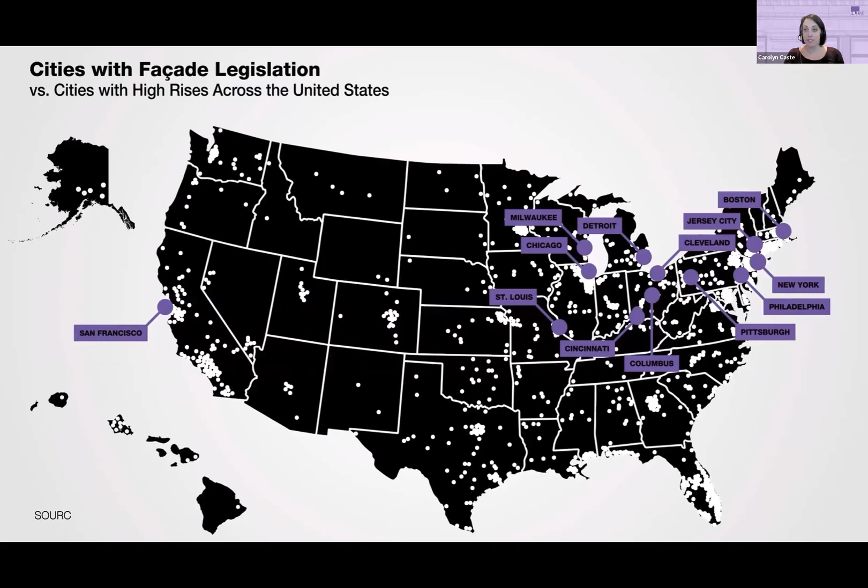As you can see with this diagram, New York City is not the only city with the regulation in place. However, it does have some of the most stringent requirements. Currently, there are 14 cities in the US with a similar rule, and Jersey City just added a similar regulation, which includes inspections of concrete structures, which was due in December of 2022, and a facade inspection program as well for any building over 4 stories that is due in December of this year. So just wanted to bring that to anyone's attention that may not have been aware of that.

To get into some more information about the New York City facade inspection and safety program, any building that is greater than 6 stories in New York City must inspect their exterior walls and appurtenances periodically. This must be performed by a qualified exterior wall inspector, otherwise known as a QEWI. And we must inspect the building, perform close-up inspections, and submit a report to the Department of Buildings that they find acceptable.

The FISP rule originally went into effect in 1980, and it's been updated several times in the past 40 years. It started out as Local Law 10 of 1980, and most people still refer to FISP as Local Law 11, which stems from Local Law 11 of '98, which was one of the updates. But it was changed to FISP in 2010, and then additional new updates were implemented in 2020, and I'll go into some details about that in a little bit.

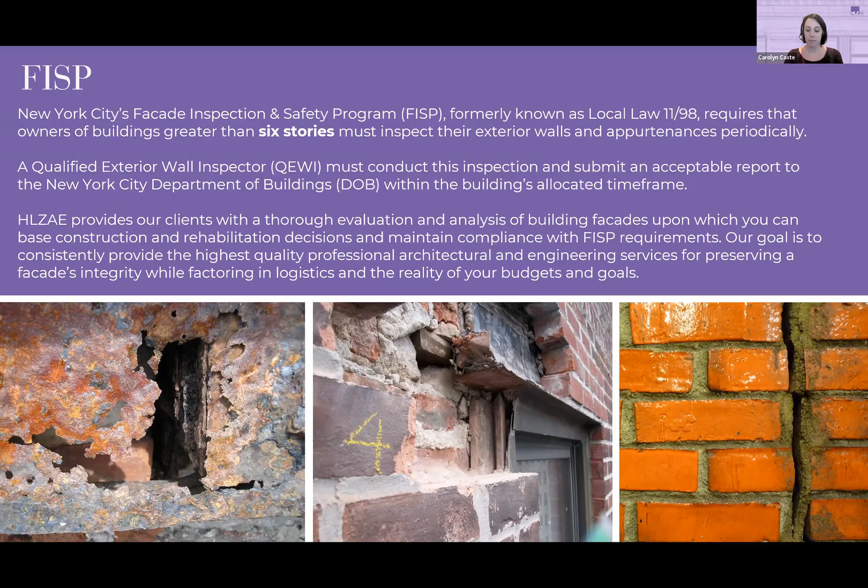But just to explain in regards to when buildings need to be filed, it is based on the last digit of the block that your building is on. So A-window buildings need to be filed in the 2-year period from, in this instance for cycle 9, 2/21/20 to 2/21/22. If your block ends in 4, 5, 6, or 9, the window has closed. The DOB will still accept reports, but there are penalties that are assessed monthly and annually with that.

The B window just closed. It was from 2/21/21 to 2/21/23. And then the C window opened 2/21/22 and is going to close on 2/21/24.

Just to give you an understanding, if you have a new building that has been recently constructed over 6 stories, you have a grace period of 5 years after the first temporary certificate of occupancy is granted, or the only certificate of occupancy is granted. After that 5-year grace period ends, if it falls after your filing window closes, you are exempt until the next cycle. If it ends before your filing window or within your filing window, you have to file a report in that cycle.

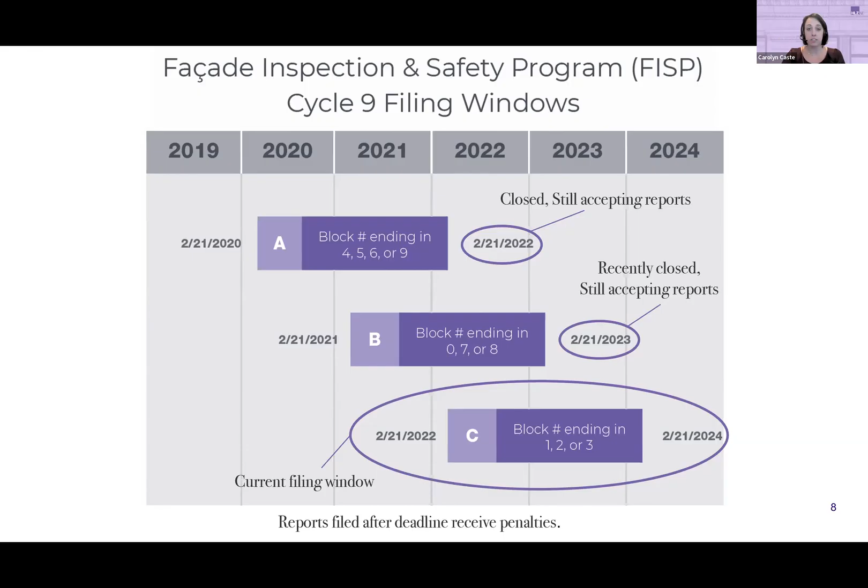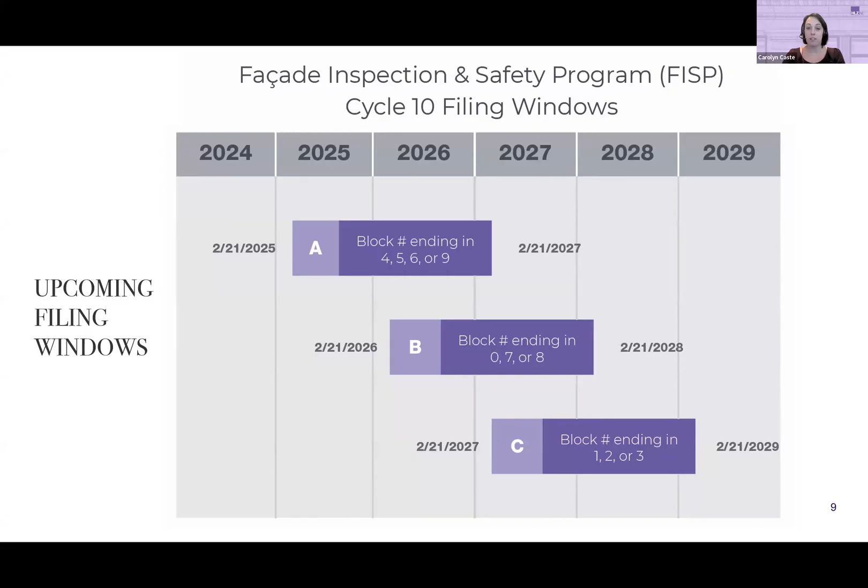And just to give you guys an understanding, if you have a building that has an ongoing repair job from 9th cycle repairs that you have to do, and the final inspections are performed within a year of your filing window opening, you can still utilize those inspections. Your close-up inspections are good for 1 year from the time of the inspection to when you submit the report. So, keep that in mind as a cost saver.

So to explain some of the things about the rule, there are 3 different categorizations for buildings that we have to determine based on the close-up inspections and general visual inspections of the building. The 3 here are safe, SWARMP, and unsafe. So basically, safe means that your building may not be perfect, but nothing will become unsafe before the next filing cycle. Unsafe is that there are either immediately hazardous conditions, something that could fall off tomorrow and cause an issue, or something will become unsafe within 1 year. So it may not fall off tomorrow, but it's not going to last very long.

And then SWARMP is safe with a repair and maintenance program. So nothing was observed to be unsafe or would become unsafe within 1 year, but a condition would become unsafe within 1 to 5 years, or before the next filing cycle. So also the new rule enacted in 2020 includes deadlines for repair timelines. So if the building is SWARMP and the building hasn't completed the repairs by the deadline identified by the QEWI, then the building is subject to violations and penalties.

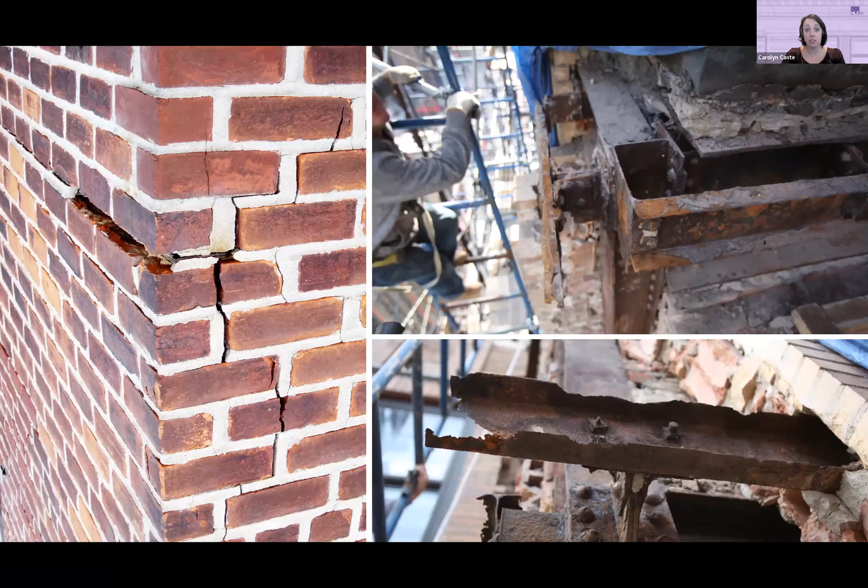So here is an example of a hazardous condition. As you can see, there's severe cracking and shifting of the masonry. And after we opened it, the structural steel behind it was determined to be severely deteriorated, and we needed to replace it. So as much as I wish we could have X-ray vision, we can't always determine the causes of the conditions based on what we see just from the exterior. So a lot of the time, we have a condition like this that we hope is just a repair, and it turns out to be something much larger.

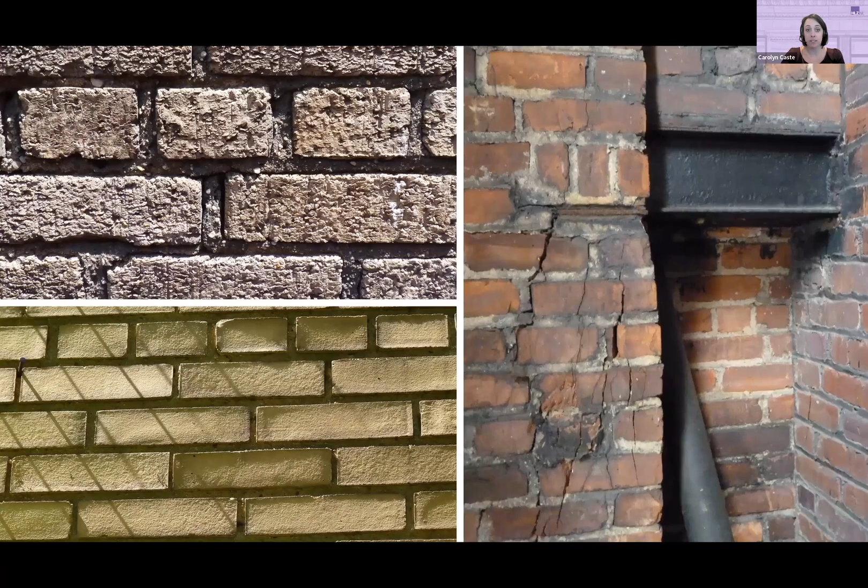We have some examples of similar kinds of conditions that could be SWARMP. You've got some deteriorated mortar and some cracked brick. This cracked brick is not over a facade. It's over an enclosed area, so we can consider it SWARMP because it's not a hazard to the public, things like that. The DOB may disagree with us, but that's a totally different story.

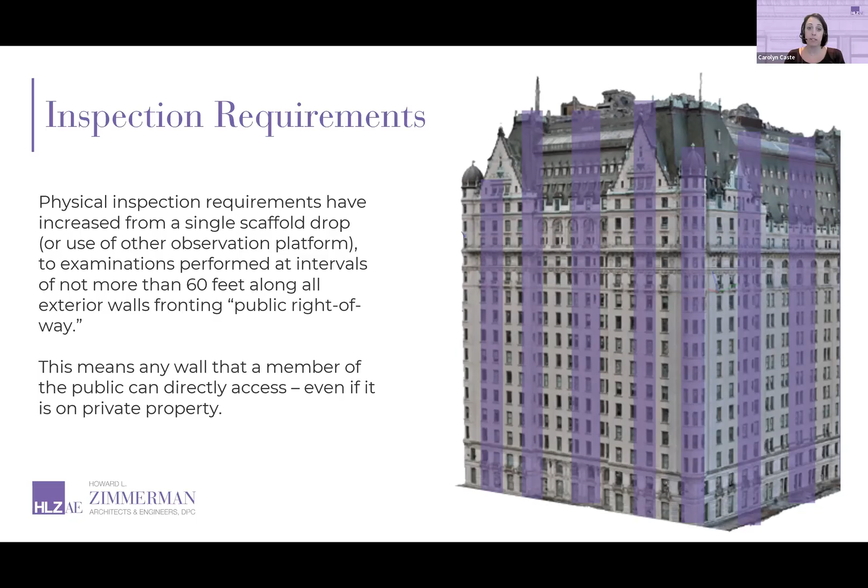And to build on what I had mentioned before with some of the changes in the 2020 updates, the inspection requirements have significantly increased. In the previous rule, we were required to do one close-up inspection at a street facade per building. Now we have to do close-up inspections every 60 linear feet of public right-of-way. So that includes anywhere that any pedestrian or person can walk under. That includes POPS spaces, or even just parking garage entries if they're set back from the street area a little bit. That additional linear footage gets added into the entire 60 linear feet requirement. So it can vary per building depending on the situation.

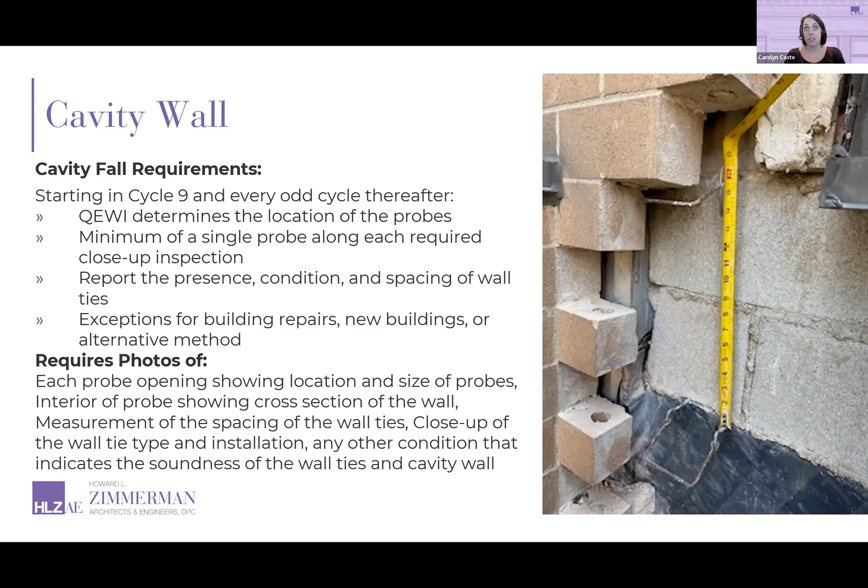Additionally, we are now required, if you have a cavity wall building, to perform probes at each close-up inspection area. There are some exemptions. If the building was built in the past 10 years or recently had a complete reskin or a pinning restoration, and we can provide evidence to the DOB that the wall ties were installed correctly, we can potentially get an exemption. But if nothing has been done to that level, we need to do probes at every location, and we need to provide photos of every probe, determine the condition of the wall ties, the backup masonry, the waterproofing, and if they are code compliant at the time of the construction of the building or the installation of the wall ties, if that was at a different time.

So the DOB has also increased their level of qualification for people who are considered to be QEs, as well as qualified inspectors. Just to throw it out there, both Brian and myself are qualified exterior wall inspectors. You need to have a professional license and more than 7 years of relevant FISP experience, meaning restoration on buildings that are applicable for FISP, and qualified inspectors must have 3 to 5 years of relevant experience on FISP buildings before they can be qualified to do the FISP inspection. Just to give you an idea, HLZAE has 8 QEs and 40 qualified inspectors on staff. So we are completely capable to perform your inspections on buildings.

The DOB also now expects multiple close-up inspections at the building, and they want additional information a lot of the time. So if something looks a little questionable, they want to know if we've sounded it, if we attempted to remove it, if there are loose materials. They want photographic evidence that the piece has been removed from the building, and they want confirmation that all appurtenances, guardrails, window air conditioning units, enclosures, everything is structurally stable and attached, and also that they are code compliant as well. So they really have upped their game in the past 10 plus years.

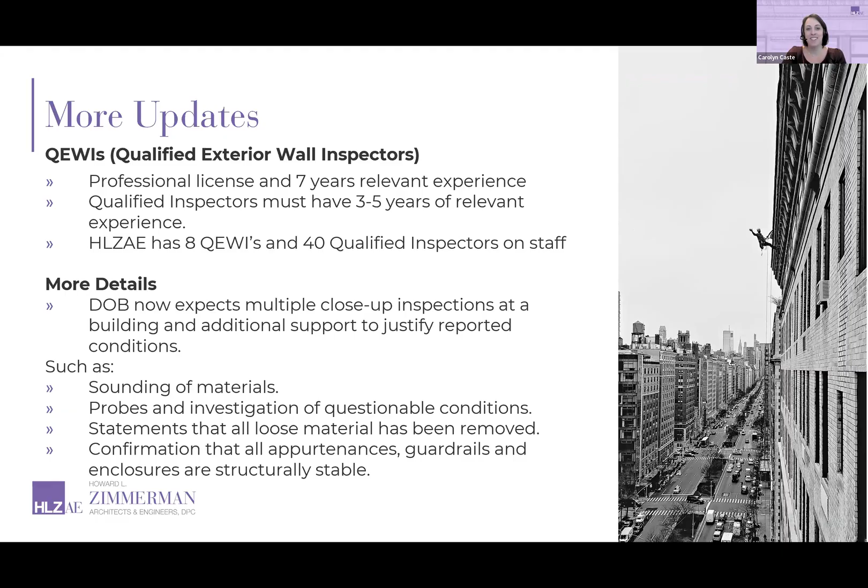As touched on before, they also have increased their penalties and added some new penalties. The failure to file your FISP report by the deadline can give you a late filing penalty of $1,000 a month. It used to be $250 a month. So that's obviously a significant increase. This is before inflation went up, so I didn't plan for that. But also the failure to file is $5,000 a year. Again, that was previously $1,000 a year. So I think they probably noticed that there were a lot of people not filing and wanted to try to motivate people.

And then the extension of time request is basically if the conditions on an unsafe building are not repaired within 90 days, a QE needs to submit an extension of time request through the DOB Now system stating that we're working on the repairs, we're making progress, this is the reason that it's taking so long, and what means and methods of protection are in place. And if those are not filed every 90 days, the building will accumulate $1,000 a month in penalties. And then there are additional penalties based on the sidewalk shed and the amount of years that have gone by for the extensions not being filed. So it can add up and be significant, especially if you have a large building.

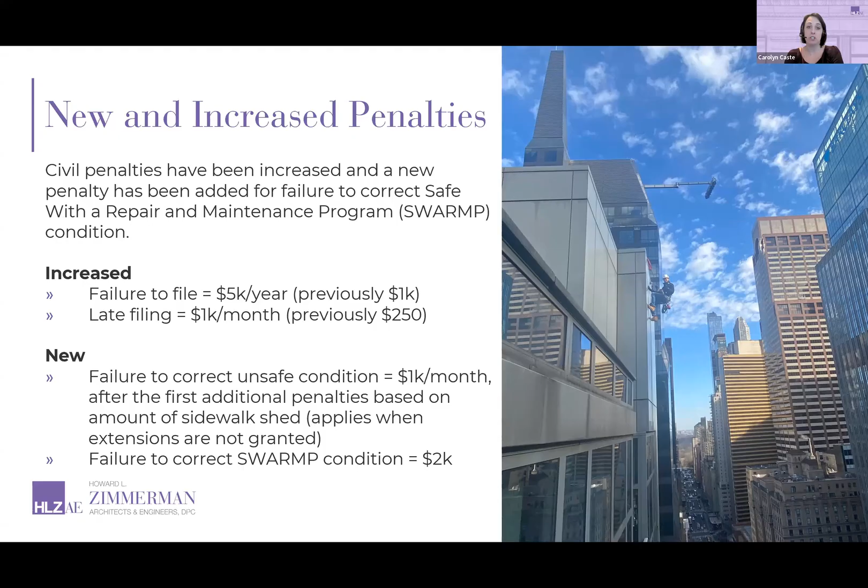Additionally, if the repairs for a SWARMP building are not completed by the timeline, the DOB can go out and issue a failure to maintain, failure to correct the SWARMP conditions, and issue a $2,000 violation for that.

Another thing that the DOB has enacted: each building that is applicable for FISP is required to post their exterior wall condition certificate in a visible area, typically the lobby or an entryway. This is similar to the energy grading. And if the DOB visits your building for any reason and they don't see the certificate, they can issue a $500 violation and continue to issue them until the certificate is posted. The certificate is available to the individual who signed the FISP report on the DOB Now safety website, or you can also request it from the QE who filed your report.

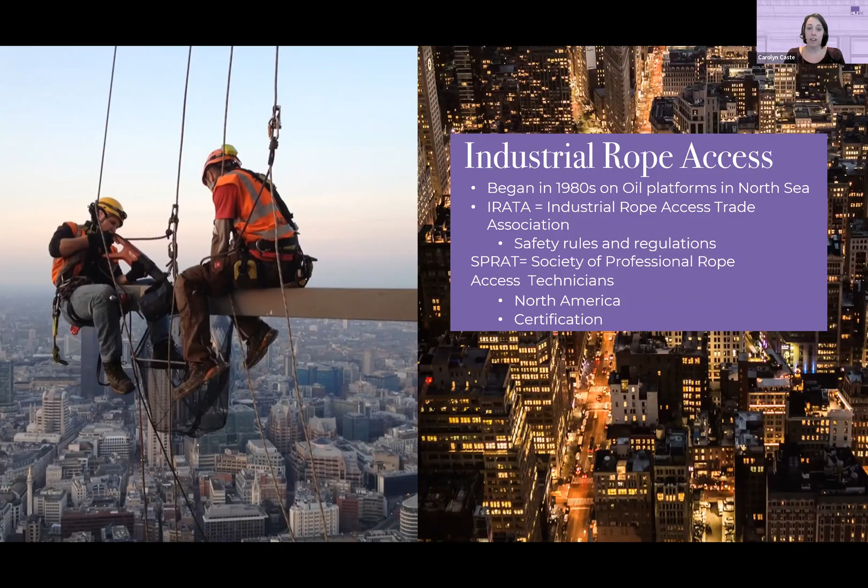So that's pretty much the summary of all of the 2020 updates and new requirements. Obviously, there's other things, but one of the things that we have found very beneficial for our clients is industrial rope access. Both Brian and I are SPRAT certified and have been performing IRA inspections for the past 6 years. It is a very efficient and safe method for performing inspections, and even the contractors can do minor repairs on buildings with this, which has been very helpful. HLZAE has 10 SPRAT certified inspectors that are qualified inspectors, and we are increasing our team this year as well.

The real advantages of rope access is we're able to perform numerous inspections in a day. The rigging is very efficient and has less impact on the occupants. I'm sure anyone who has had scaffold rigging on a setback that is a tenant or a unit owner's area has gotten tons of complaints over that. This is basically us just landing on it with a rope and then continuing on. So we may have to close it down for a day, but we don't have to close it down for multiple days. So usually the tenants are much happier with that option.

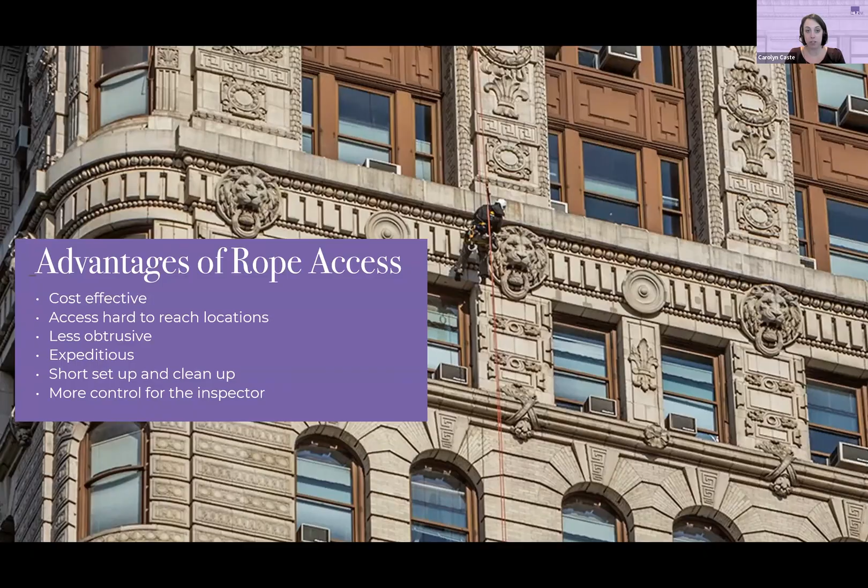So this is an example of us performing inspections on 111 West 57th Street. We had to inspect 100% of the building as mandated by the Department of Buildings after an incident of something becoming unsafe on the building. First, we inspected the interior to make sure that there was nothing really loose, and then we inspected the building 100%. Did take a while, but it was really fun.

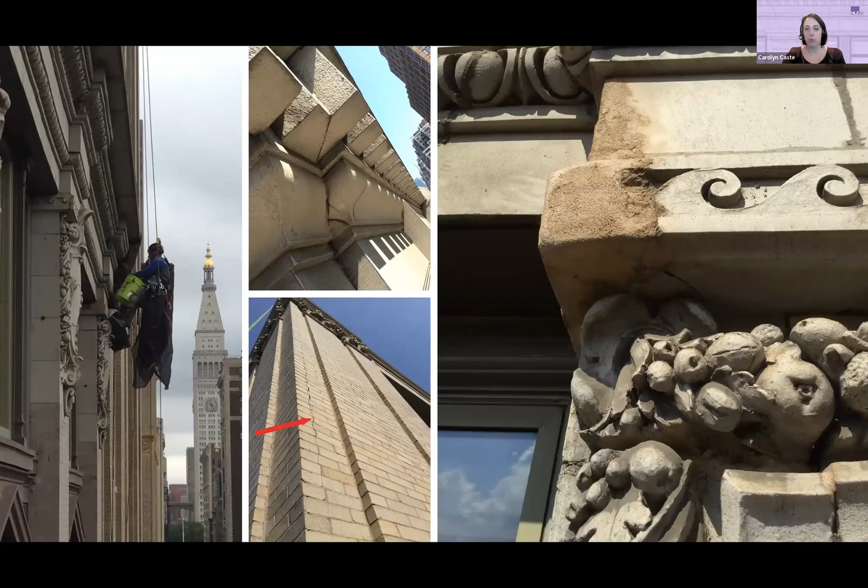As I was saying before, we can have contractors make some minor repairs. A violation was issued to this building and the contractor was able to make minor repairs quickly and without a sidewalk shed to resolve the violation. This was a very large building, so it saved the building a lot of money in regards to a sidewalk shed.

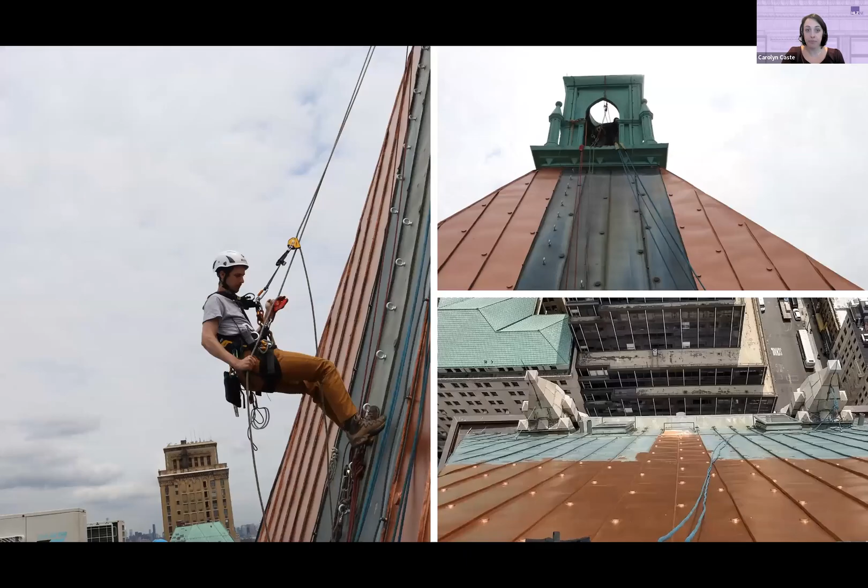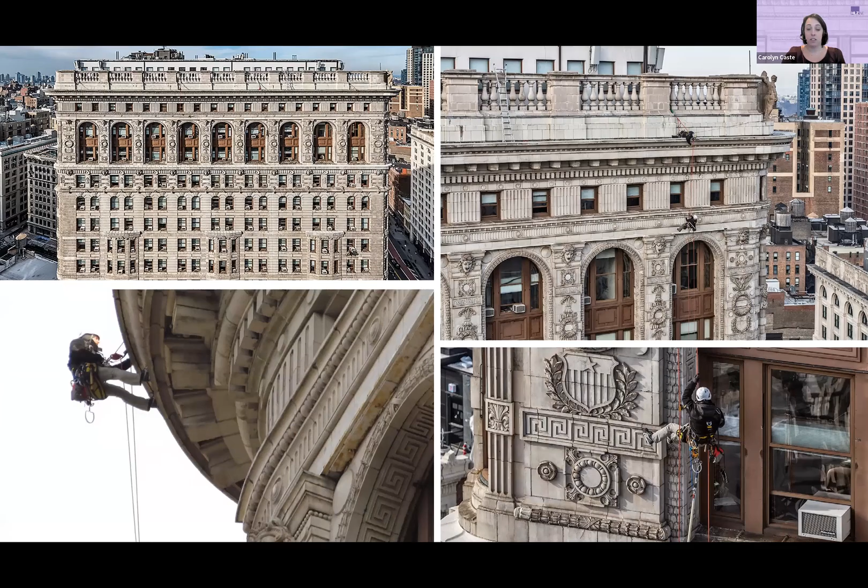This is another building where we were able to utilize rope access and a contractor. We saved the client about $75,000 by not having to pipe scaffold the cupola to waterproof it. We were also able to inspect the waterproofing to confirm it was installed correctly, so it has multiple advantages there. This is the Flatiron building. We performed 18 inspections in one day and were able to save the client approximately $100,000 in pipe scaffolding based on our findings for the repair campaign on this building, which has been going on for a while.

So basically, we are here to help. And while I hopefully have your attention, my strongest recommendation to building owners or boards is to get ahead of the game. The longer you wait, the less options you have in regards to FISP. At the end of the year, the DOB gets backed up, CD5s take a lot longer to get approval, and contractors are very busy. So you can't make last minute repairs that might be easy to do at one point, because they can't squeeze it in, and you also have weather complications. So I really encourage you to start your FISP inspections as soon as possible.

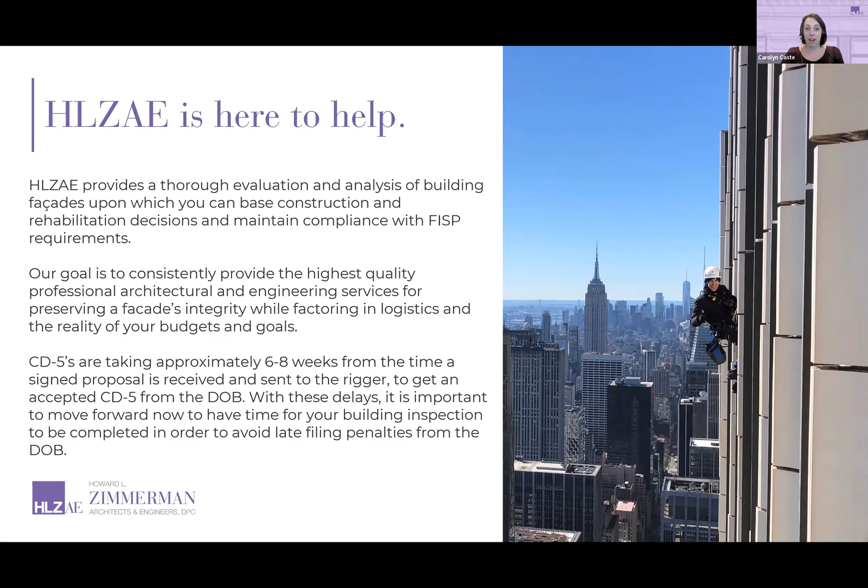As I mentioned before, the inspections are valid for 1 year, and it gives you more time to make decisions and potentially make some small repairs so that you have maybe a safe building, or maybe not an unsafe building. Maybe you have a SWARMP building. It really can make a big difference in the long run. So I hope this was informational to everybody, and I will now pass it over to our very qualified Brian Chester.

Thank you, Carolyn. So Local Law 126, periodic parking structure condition assessments. This is a new rule. The Department of Buildings initiated this, somewhat as a reaction to the Surfside building collapse in Florida. The idea is, in an organized fashion, to get eyes on these structures and make sure they are safe for the occupants and the buildings above them, especially in Manhattan. A lot of these parking structures are beneath buildings. So if there is ongoing and unchecked deterioration beneath an entire occupied building, worst case scenario, things like what happened in Florida could happen.

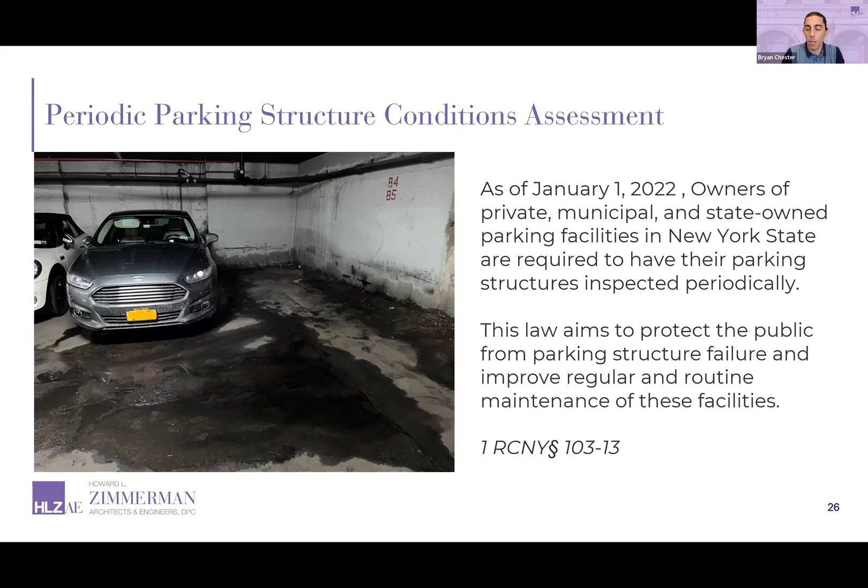So this is a response to that. The rule is based on RCNY 103-13. So aside from this entire presentation, it's like a couple of pages. So if you wanted to read it, you can go through it, and they list it out pretty well, even for the layperson to understand what the rules are.

So, in general, if you're familiar with FISP, this will be familiar. Every 6 years, parking structures need to be inspected. They have to be inspected by a qualified parking structure inspector, QPSI. That's a whole process to get accepted to that based off of certain qualifications. There's an interview with the Department of Buildings. And I believe the Department of Buildings has a registered list of the qualified parking structure inspectors on their website. Our company has a couple of them. So yeah, so we can take care of them.

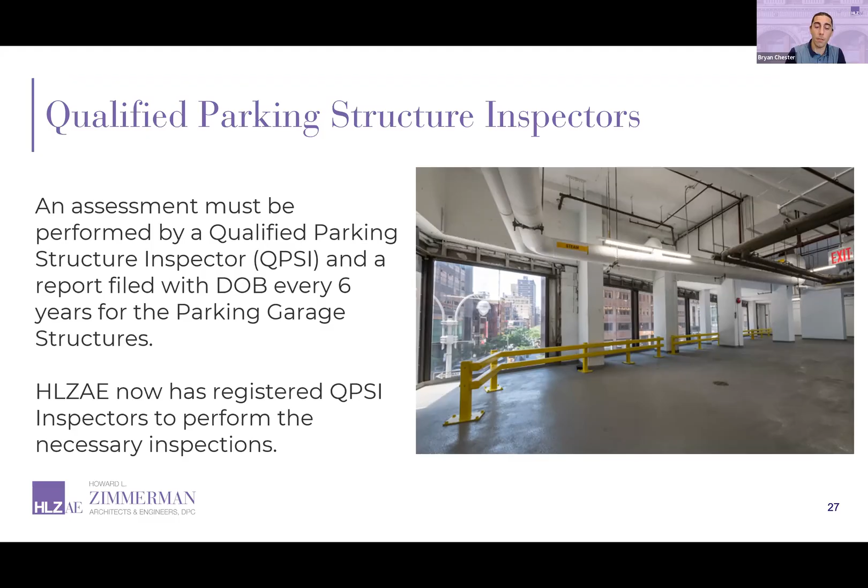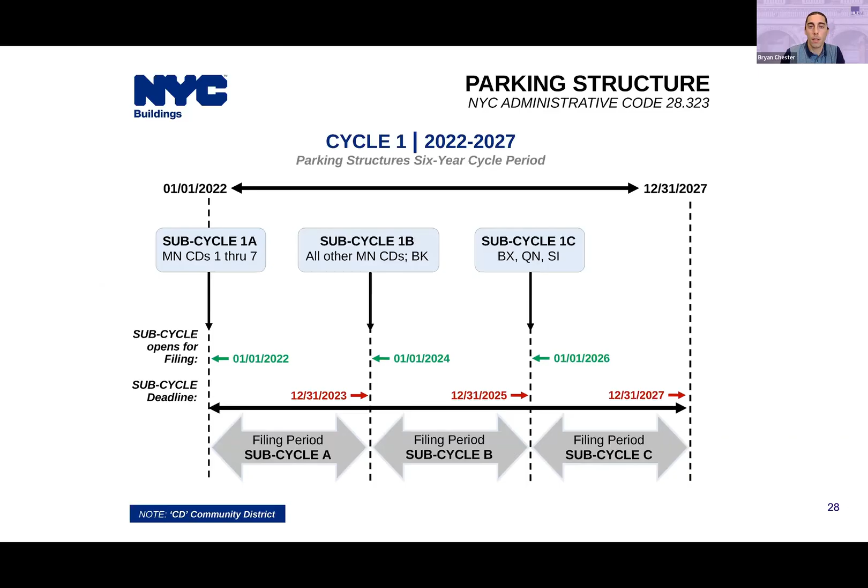The timing for when the inspections and reports must be submitted is based off of this chart, and here's sort of a simplified version of it. Basically, it's all relative to your community district. If you're not sure what your community district is, you can Google Manhattan Community District and a little map will pop up. It will tell you exactly what you have. So basically, if you are a building owner or property manager in Manhattan, you'll definitely want to go check it because your property might be due at the end of December 2023. Otherwise, the rest of them and the outer boroughs will be 2025, 2027. So it's already happening. We're 1 year into it.

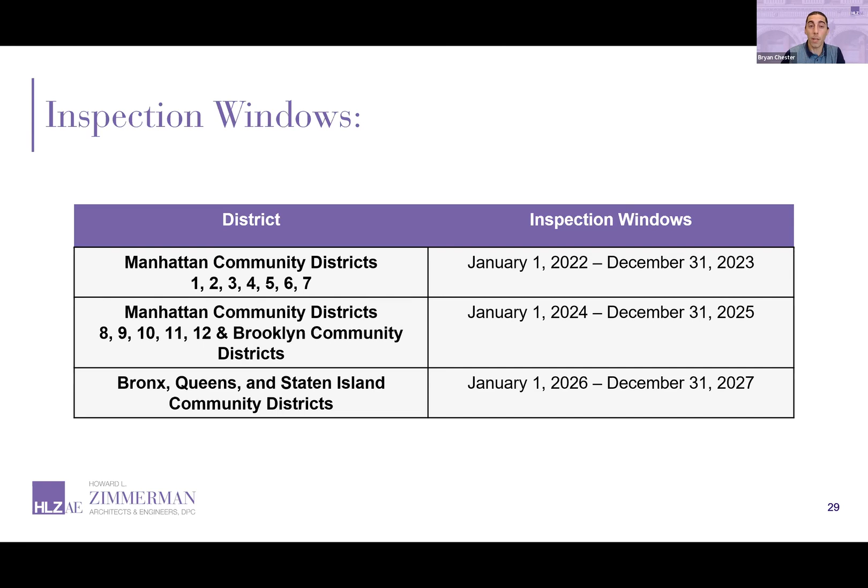So who the parking structures apply to, it's generally everyone, private, municipal, state-owned, commercial, residential. Basically, if you've got more than 2 or 3 parking spots, it probably applies to you. Standalone parking structures that you would see, more in the outer boroughs or even in the suburbs, those apply. The garages I was mentioning underneath the buildings, those are going to apply.

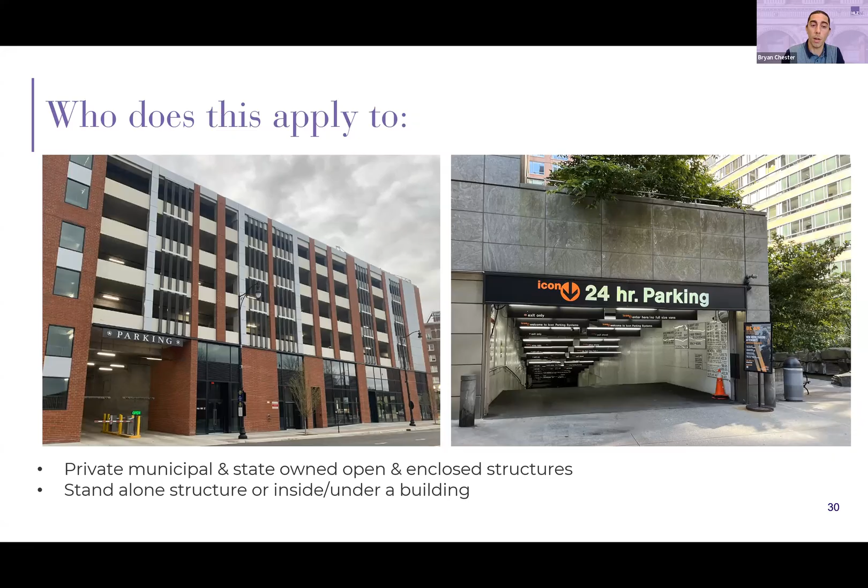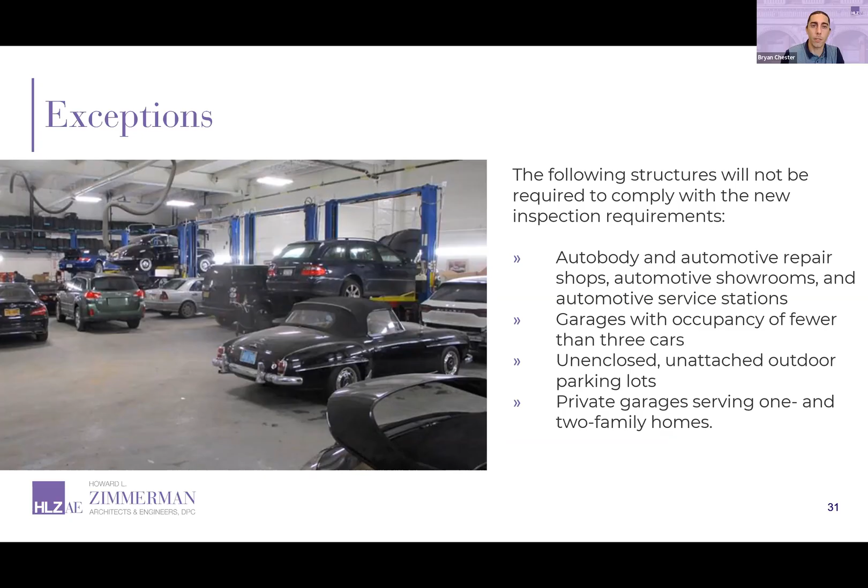In some respects, it's a little easier to think about who doesn't apply. And this is listed in the rule, but auto repair shops, outdoor parking lots. I think probably the most important one for people to remember is the private garages for 1 and 2 family homes and garages with fewer than 3 cars. And I'll use the term garage and parking structure interchangeably here, same thing.

So the inspection procedure, you're going to have to retain a qualified parking structure inspector to kick all of this off, but generally speaking, it's incumbent on them to design the inspection program based off of the age of the structure, the materials, history that they would determine from reports, previous repair campaigns, and they'll set that forth with a visual inspection. The visual inspection tells us a lot, but it doesn't tell us everything. Further, the QPSI will continue to sort of customize what type of inspection is going to be needed. And that's where we go into sort of the physical examination.

I think this is where it starts to diverge a little bit from FISP. This is far from just a visual inspection, and not that FISP is, but there's pretty stringent requirements for just how hard of a look we're going to have to take into the parking structures, and I'll get into that a little bit later. A report will be generated, submitted to DOB for their acceptance.

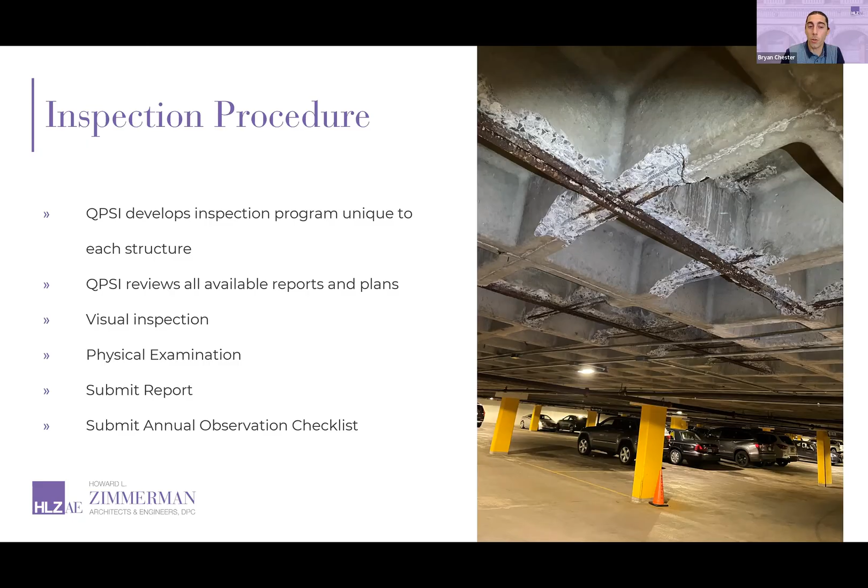And another interesting thing that they will be having is we will have to submit a sort of customized annual observation checklist to the parking structure. And they will have to have their designated person whom they feel is qualified to go out every single year and look at this checklist. And it would be their responsibility, if they found something worrisome, to notify the QPSI or some other professional to come out and take a look. So basically, from now until further notice, some human being will be looking at the requisite parking structures every single year, not just the reports.

So I mentioned physical examinations. At a minimum, 10% of each structural element is going to need to receive this physical examination. And they want us looking at the most deteriorated areas. So that's going to be 10% of beams, columns, slabs, ramps, girders. And at a minimum, that's going to be sounding. They list other potential types of physical examination, which could be cores, probes, non-destructive testing, optical surveys. Maybe you're going to do lab testing for chlorides, things of that nature.

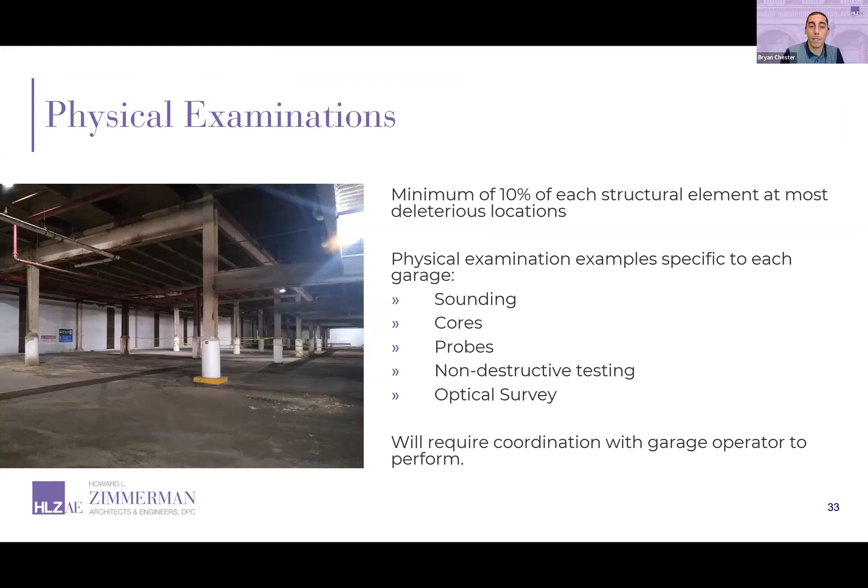But it's all going to be sort of dependent on what type of deterioration the QPSI is finding and what information they need to get from the structure. I'll get into this a little bit later, but if there's safe with repair and maintenance type items, the structural analysis is going to have to be performed on the structure. So if we don't have plans, some of this physical examination starts to come into play, where now we need probes or GPR to locate reinforcing bars, things of that nature. So it turns almost into a forensic type investigation.

So I touched on this a little bit before, the structure, the obvious things: beams, columns, slabs, girders, ramps, bearing walls, connections. Even if there's a situation where maybe the parking structure is above another level, we're going to have to inspect the level below in case deterioration has migrated down. Or conversely, if there's something above a parking structure that seems to be leading to deterioration inside the parking structure, we're going to have to inspect that. So I don't foresee too many situations where that would happen, unless we're talking about a landscaped roof or something like that. But from an interior standpoint, that would be an odd one. But underneath, certainly, anything beneath a structure like this is going to tend to deteriorate as water infiltration migrates down.

Appurtenances, there is an enormous list of appurtenances that the DOB marks in the rule for inspection. It's basically everything: roll down gates, bollards, light fixtures, wearing surfaces, railings. Fire stopping is going to be an interesting one. People don't usually pay much attention to fire stopping in parking structures, especially when it's underneath buildings. There's decades of abandoned and sometimes live conduit plumbing, and they're not always very well fire stopped. So it'll be interesting to see just how forceful the Department of Buildings is with the fire stopping issue, but that's going to be part of it. So they're looking at everything, and it's going to be a lot on the QPSI to find all this stuff.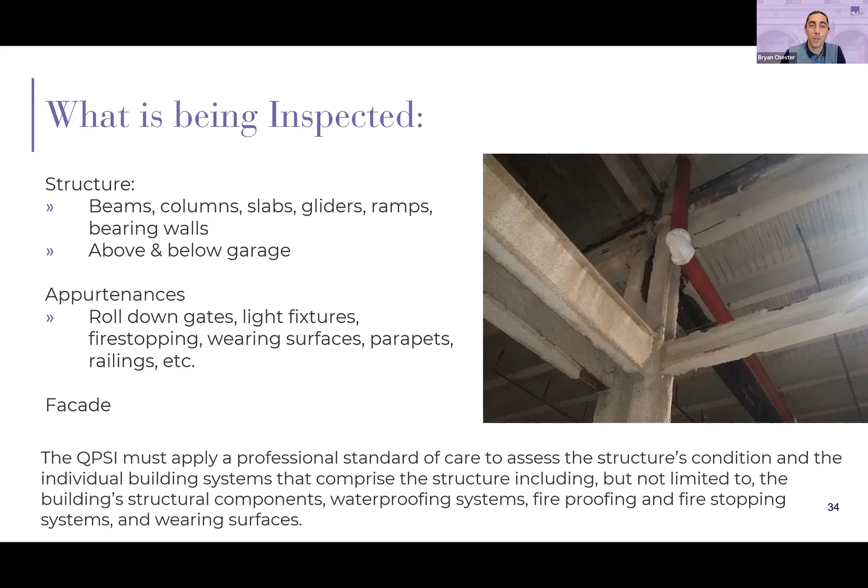Facades is also a part of this. It's easiest to think of facades if this is a standalone parking structure outside of a mall or something like that, then we're going to have to inspect the facade. But, thinking of it conversely, just by exceptions, if the building's already part of FISP, you don't need to inspect the facade again. It's taken care of. If your building is outside of the requirements of FISP and it occupies less than 50% of the square footage of the building, then we don't have to do it. But there will be some shorter buildings that are mostly parking structure in the city and boroughs that are going to have their facades looked at now.

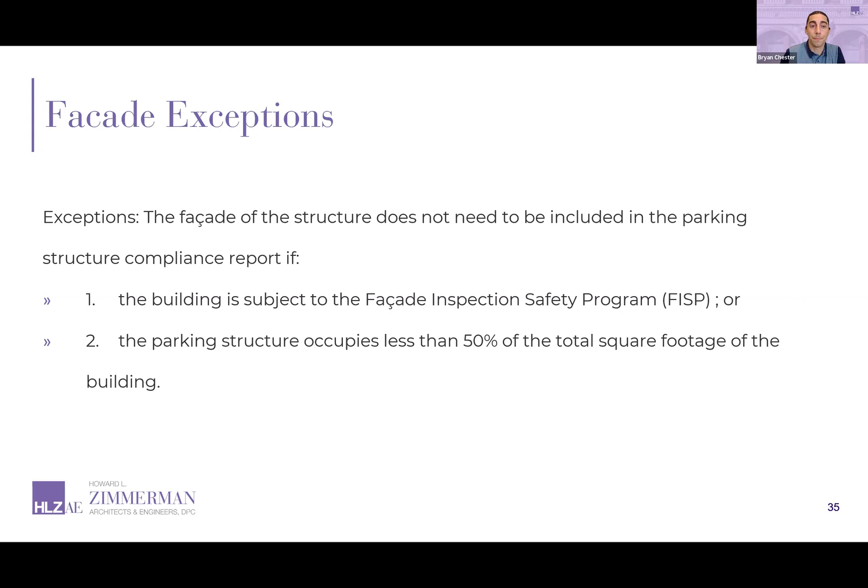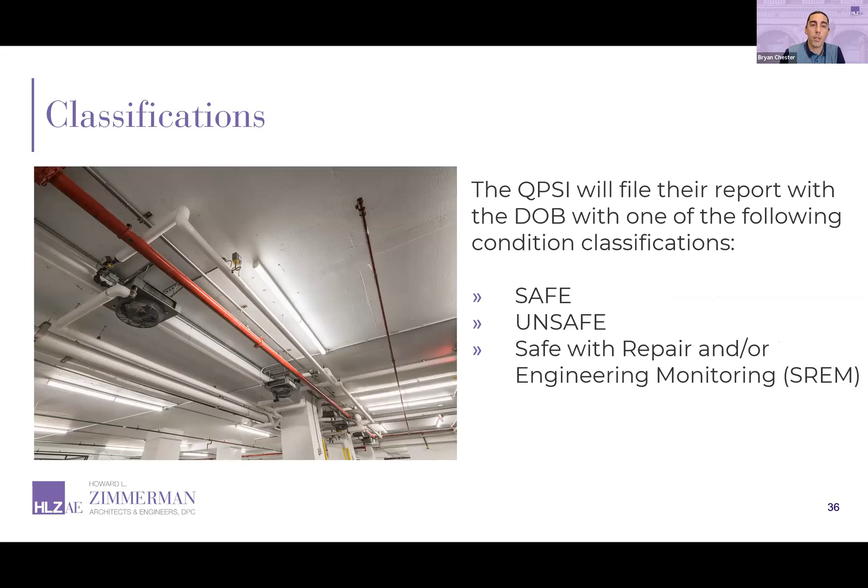So similar to FISP, we have safe and unsafe. Those are familiar. Another classification for the parking structures is going to be safe with repair and engineering monitoring, or SREM. Just thinking about safe, very similar to what Carolyn mentioned before, these structures aren't going to be perfect, but if conditions of deterioration are not going to become unsafe within the next 6 years, then we can consider them safe. If they are SREM, they're sort of falling in between the two. So we think that if it's not addressed in the shorter period, this is something that could become unsafe.

And if a parking structure is going to be classified as SREM, it sort of kicks off a cascading effect of next steps. So the parking structure inspector is going to have to map all of these locations, and that means going out and drawing the parking structure. So that's going to be a pretty big demand on time. So important for parking structure owners and managers, if you've got drawings, get them to your engineer from the start. It saves them a lot of time.

Another thing that's going to happen is structural analysis of the deteriorated members. So the Department of Buildings wants the engineer to prove load carrying capacity of those beams and columns and slabs, et cetera, that are deteriorated, and also compare them back to members that are good. And that sounds pretty straightforward, except if you remember, nobody has plans for their garage. So this is where some of that physical examination might come in, and your engineer is going to have to go do probes, find out what the structural members are beneath the concrete or concrete encasement, whatever your structure is made of. But this analysis is going to be interesting as well.

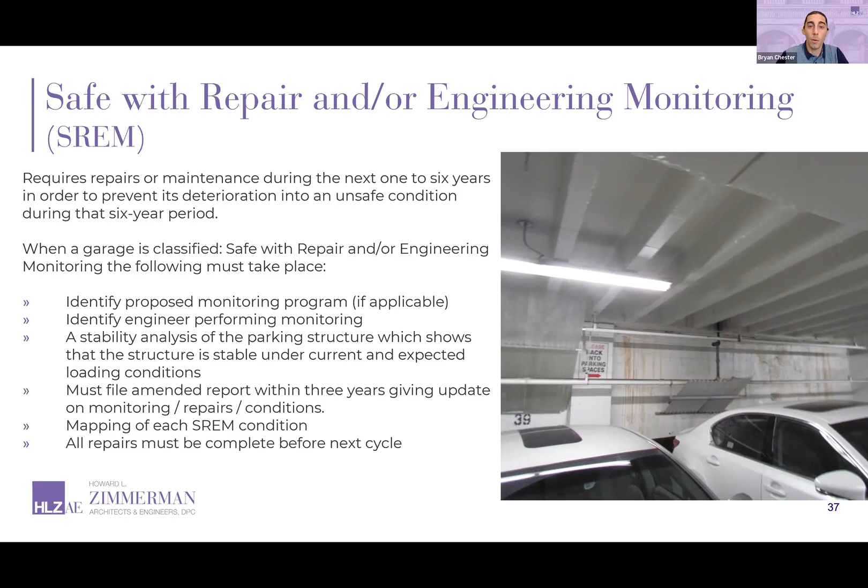So if you add all of this up, it really behooves you to have a safe parking structure, because all of this talking just sort of translates to money. And so that's what owners and operators of these parking structures are going to want to avoid. So keeping them safe is the name of the game.

So unsafe conditions. These are the conditions that are immediately hazardous. That could be overhead concrete is going to fall, or could be something significant enough that we're worried about either a partial or full structural failure. The Department of Buildings is sort of going to treat these similar to an emergency. The unsafe conditions need to be corrected within 90 days, which, if you think about permitting things, getting contractors involved, performing this work, it's really a short window.

In the sort of immediate now of finding an unsafe condition, the Department of Buildings is going to have to be notified. 311 is going to have to be called. They are going to want immediate measures to make this condition temporarily safe. That could be temporary shoring done on an emergency basis. They'll issue an emergency work order. Netting. There could be partial vacates of an area of the garage, the entire garage. In a worst case scenario, could be a full vacate of the building.

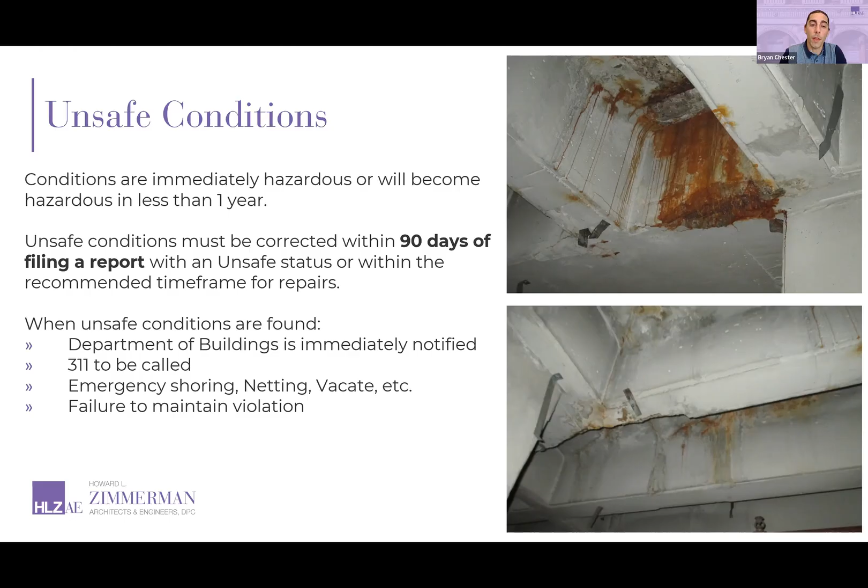So, if you've had an unsafe condition, you take all of the proper steps, you fix it. The QPSI is going to have to go back out and inspect and file another report. As I mentioned before, 90 days is what they're looking for in terms of a turnaround time of fixing these. That's not always very realistic. Honestly, that would be incredibly impressive unless it was a very local issue. But if you're human and you can't get it done on time, time extension requests can be filed. If you give them a good enough reason, they'll probably allow it. But again, it depends on what we're talking about.

It's probably a little bit easier, I'm guessing, to get time extensions for FISP type items because things tend to be perhaps a little bit more architectural in nature, but if these are structural components, and if people are occupying the building, they're going to be a lot more strict about it, in my estimation.

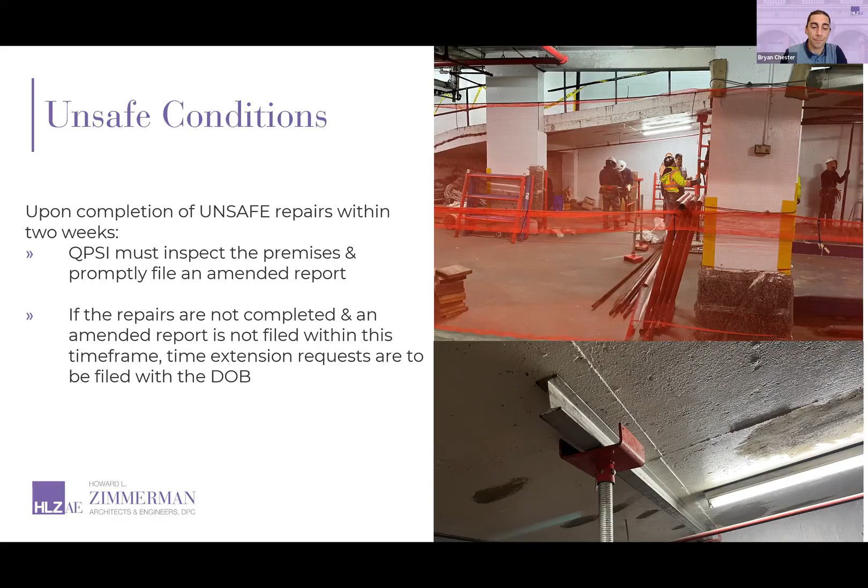So this is a great example of a parking structure in Manhattan. It's beneath, I think, a 30-story building. We went out there to do our 10% physical examination through sounding, and you can see, and by the way, this was not meant to be material removals, this was sounding. And all of these areas of spalls with exposed reinforcing bars, these were all previous repair locations, not by us, that were not properly done and were falling.

And so, if you coordinate often with your parking structure operator, owner, whoever they are, they get pretty cranky when you start taking parking spaces away. This structure ended up having a full vacate, not the building, but all of the parking, both levels, got a full vacate until emergency shoring could be installed. And what you're seeing here is not the emergency shoring. This was the sounding contractor just wanted to put something up. But the actual shoring was designed, filed, installed under an emergency work order.

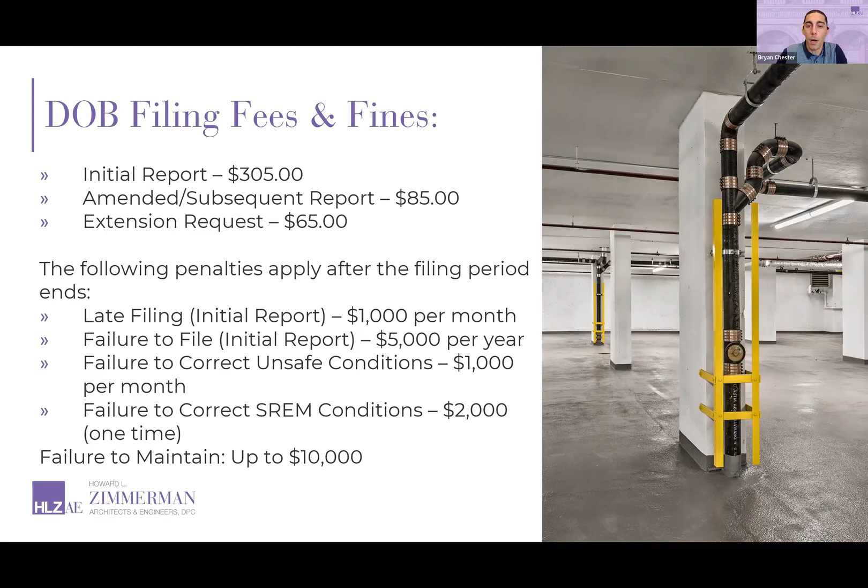So as I mentioned before, you really want to start now. One of the interesting dynamics of this is the building ownership, the parking structure ownership or lease. These are always kind of interesting relationships, and there's often a lot of finger pointing about who is actually responsible to maintain these structures and where are we drawing the lines. Ultimately that's going to come back to what it says in your lease or bylaws, or whatever that sort of ownership dynamic is.

But start the conversation now, because if there's anything that I can tell you with certainty, it's that every day that the garage operator doesn't have full capacity in terms of parking, they're going to be upset, and they're probably going to be looking for some type of compensation. So starting this communication early, letting everybody know that this is coming, doing your homework, who's responsible for what, can help down the line, because as we're starting some of this physical examination, you can't sound over top of cars. You're going to have to remove them. Will you have to empty your entire parking structure? Probably not. But you might be operating at partial capacity while this investigation is going on for a day or two, whatever that's going to look like.

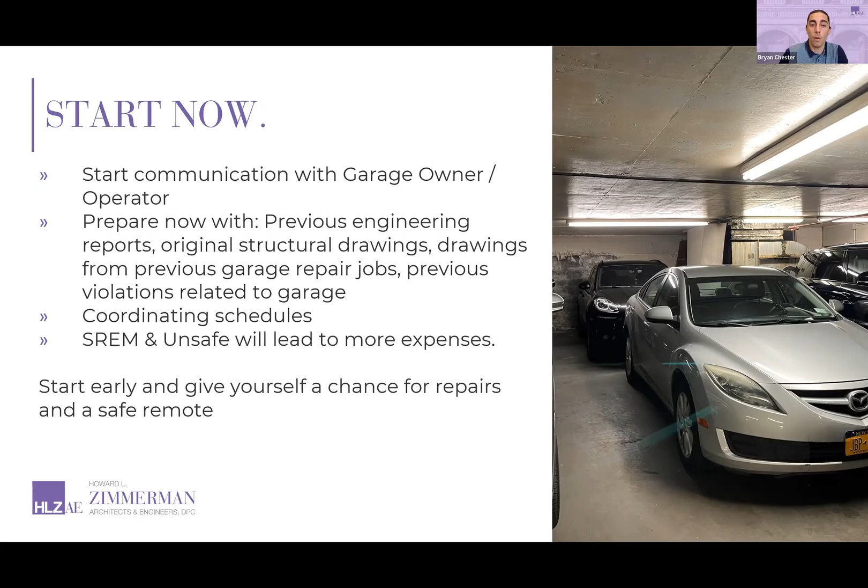If you hustle now, even if you're part of this first cycle, you might have time to take care of all of that and have a safe structure and avoid this analysis, avoid a monitoring program, avoid another report that you have to file in 3 years. And by the way, you're going to have to do these repairs before the next cycle anyway. So if you can start them now, avoid those types of headaches.

And yeah, so to wrap it up, what you can do now is everything that I just talked about, but maybe the easiest thing is just reach out to us or your trusted consultant who happens to be a QPSI. Start that conversation now.

And this is new for everybody. So I think anyone who's a QPSI knows that there's going to be a learning curve in educating the property owners and management, even Department of Buildings. I'm sure they're still figuring out just exactly how they want to police this and implement it. So give us a call and we'll start there.

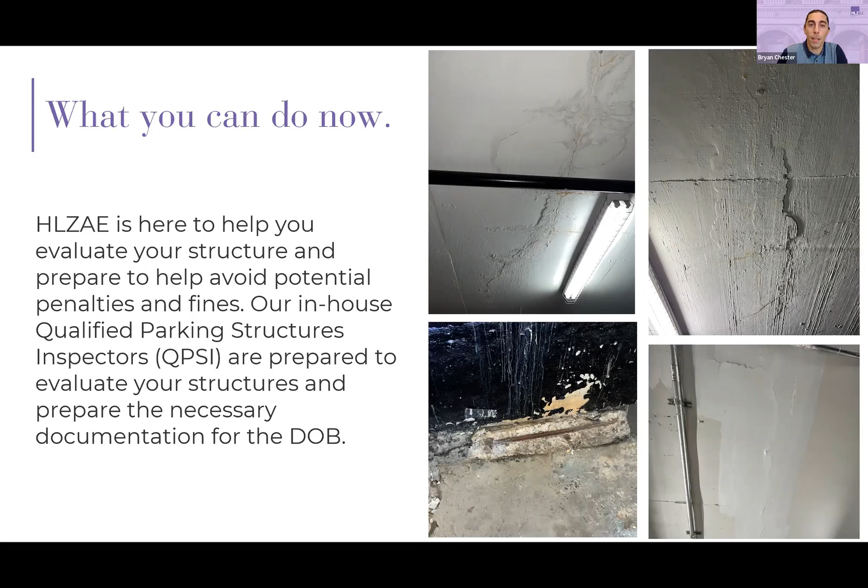All right, thanks, team. Looks like we have just a couple minutes here for a couple questions. I'm gonna hit one from the Q&A. No, I'm gonna hit three here. One question here to start us off.

Is a shed required during the FISP process as performed via rope access? No, it is not required for the inspections. With one of the contractors that we work with, we can do probes via rope access and inspect them without a shed. They have a proprietary protection method that has been approved by the DOB. So you actually do not need a shed for performing probes in that regard. Again, it may depend on the situation otherwise.

And something that I realized I forgot to bring up: if your building is unsafe, you do need to put a shed up immediately. And if it's a hazardous condition, your QE can provide you with an emergency shed letter so you can get it up right away. There's also other means and methods for securing things. You can do structural netting if it's isolated conditions instead of putting up a shed. But again, this will all depend on the conditions on the building.